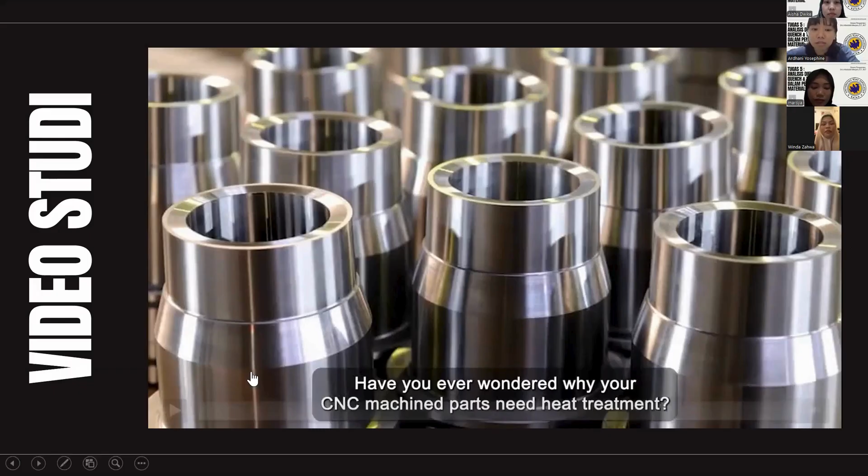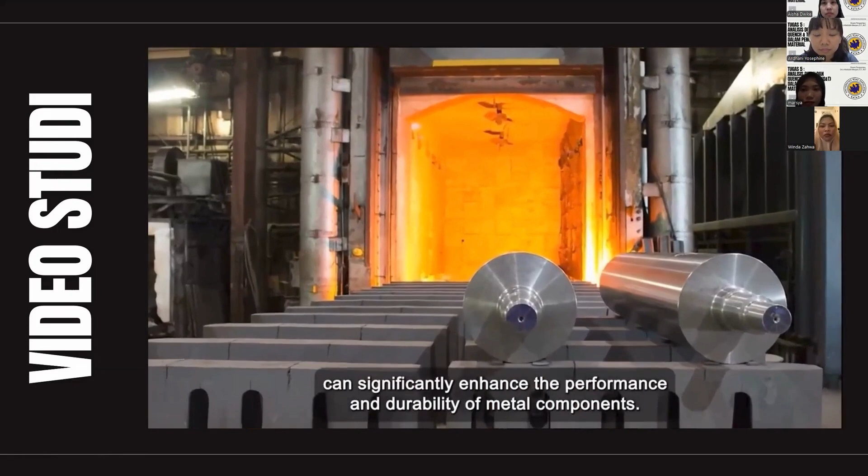Have you ever wondered why your CNC machined parts need heat treatment? The answer lies in the transformative power of heat treatment, a process that can significantly enhance the performance and durability of metal components. Welcome to Rapid Direct. Today we'll explore the process of heat treatment and how it works. Without further ado, let's get to it.

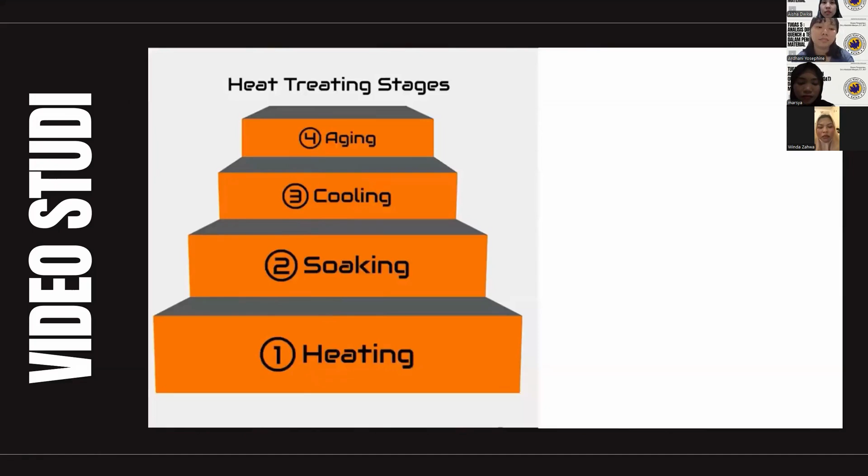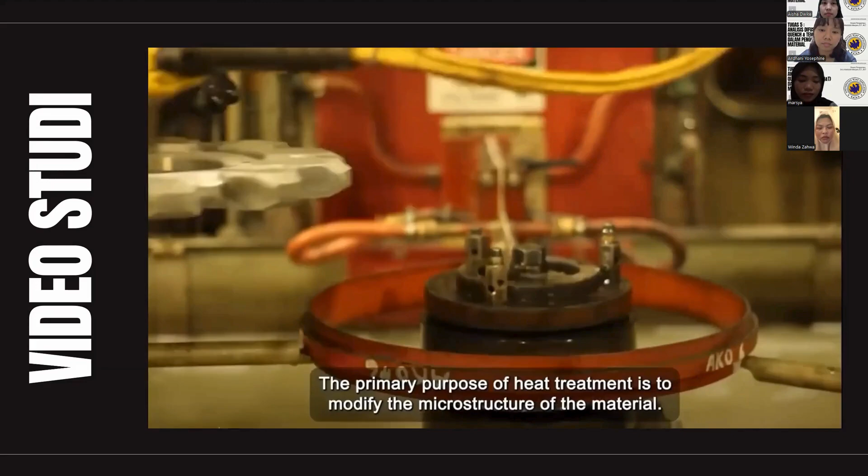Heat treatment is a controlled process that involves heating and cooling metal components to alter their properties. The primary purpose of heat treatment is to modify the microstructure of the material. This, in turn, affects its hardness, strength, ductility, and other characteristics. This means heat-treated parts can withstand greater stresses and perform better under demanding conditions. This process can profoundly impact the performance and longevity of various products.

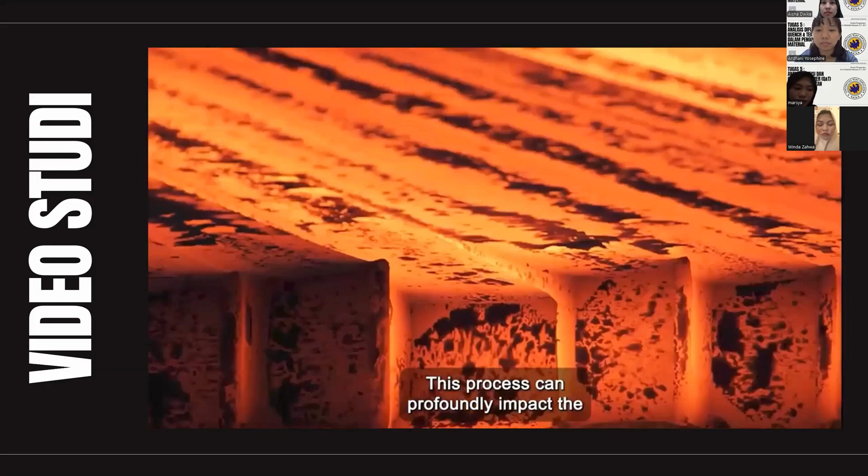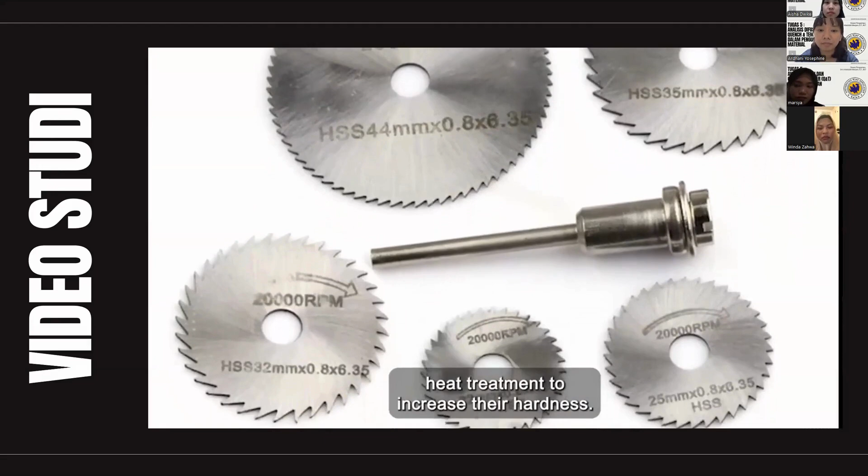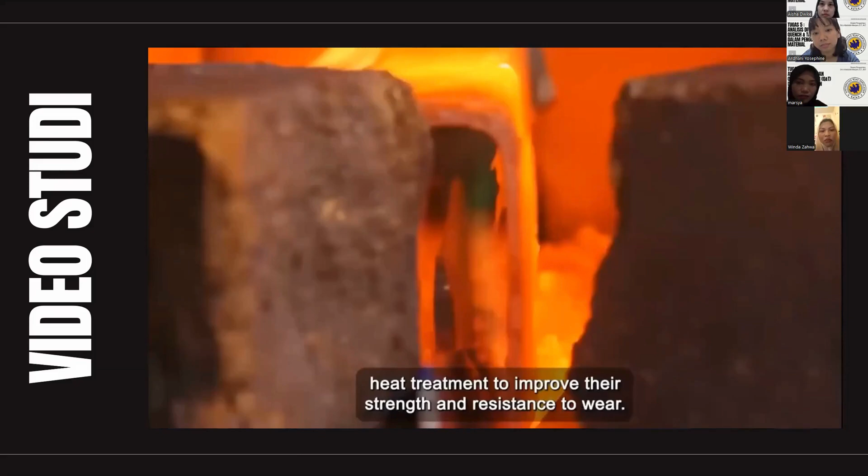To better grasp the significance of heat treatment, let's consider a few examples. Tools, like drill bits and cutting blades, undergo heat treatment to increase their hardness. This enables them to withstand repeated use and maintain sharp cutting edges. Automotive parts, like engine components and gears, often undergo heat treatment to improve their strength and resistance to wear.

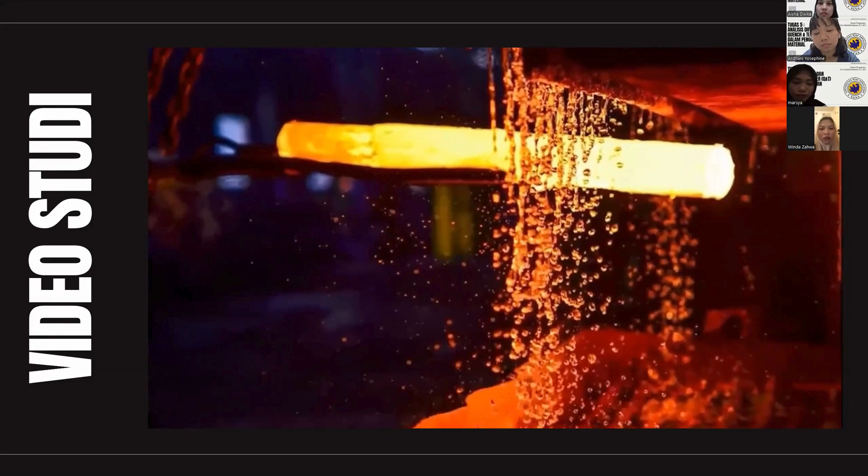Now, let's explore the 5 fundamental heat treatment techniques that are commonly used to achieve specific material properties. The first one is annealing. It involves heating the material to a specific temperature and then slowly cooling it to make it softer and more ductile. This process also improves machinability, making the material easier to shape and form.

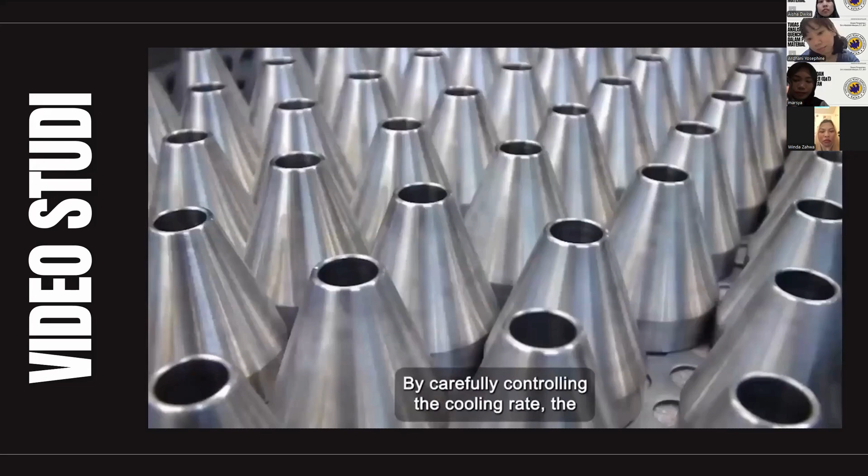Secondly, we have quenching. This is the rapid cooling of the materials to increase their hardness. By carefully controlling the cooling rate, the microstructure of the material can be transformed. This process is known as martensitic transformation. This results in a harder and more brittle state.

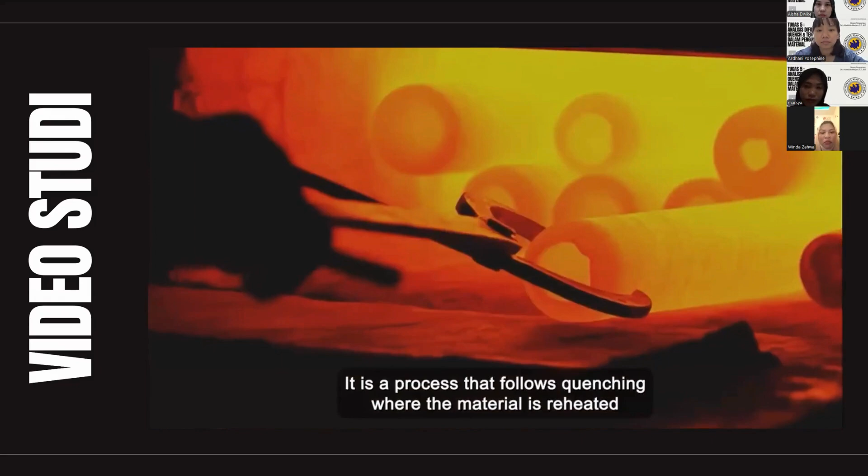The third technique is tempering. It is a process that follows quenching, where the material is reheated to a specific temperature and then cooled in a controlled manner. This step helps reduce the brittleness introduced by the quenching process while balancing the hardness and toughness of the material to make it more resistant to fractures and ensure optimal performance.

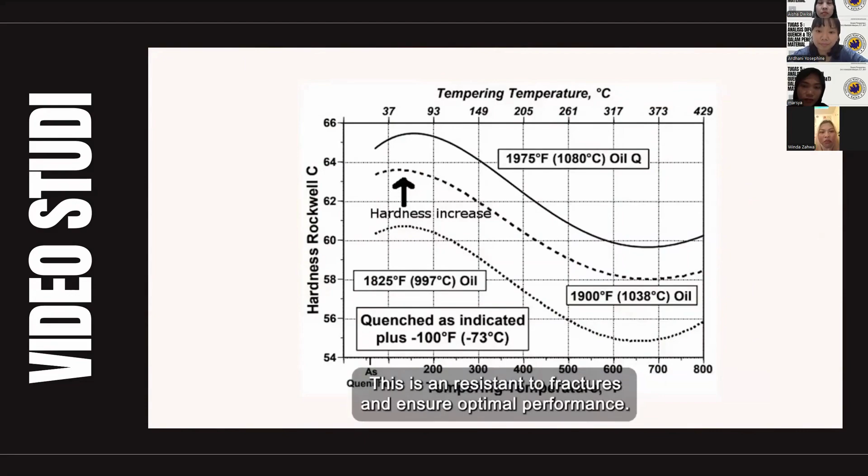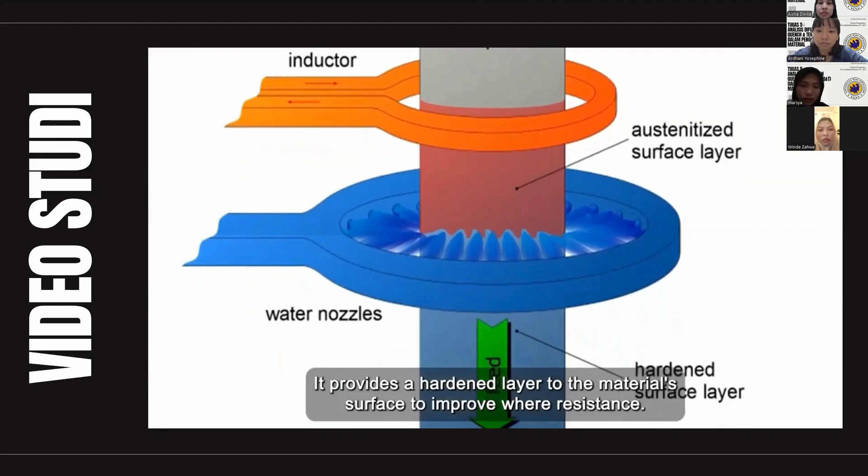The fourth technique is hardening, which involves heating the material to the austenitizing temperature, followed by rapid cooling through quenching to form martensite. It provides a hardened layer to the material's surface to improve wear resistance. This technique is often used for components that require a hard exterior while maintaining a relatively softer and more ductile interior. Finally, there is normalizing.

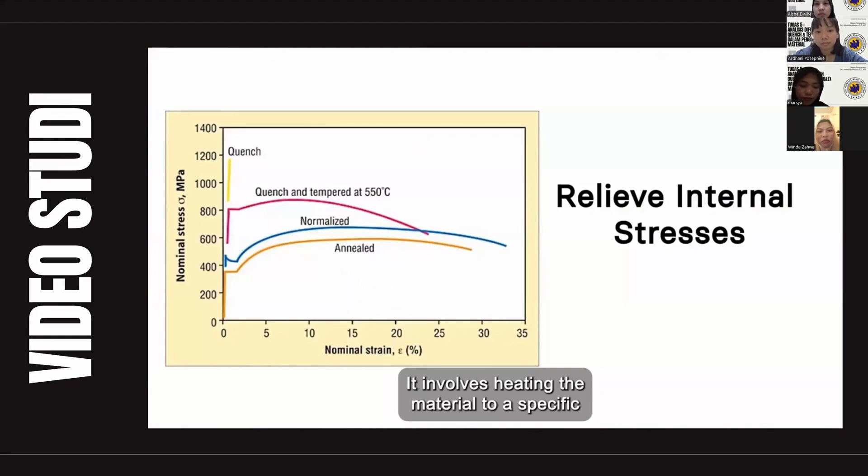This technique aims to achieve a uniform microstructure and relieve internal stresses in the material. It involves heating the material to a specific temperature and then cooling it in still air. This process improves the overall strength and toughness of the material.

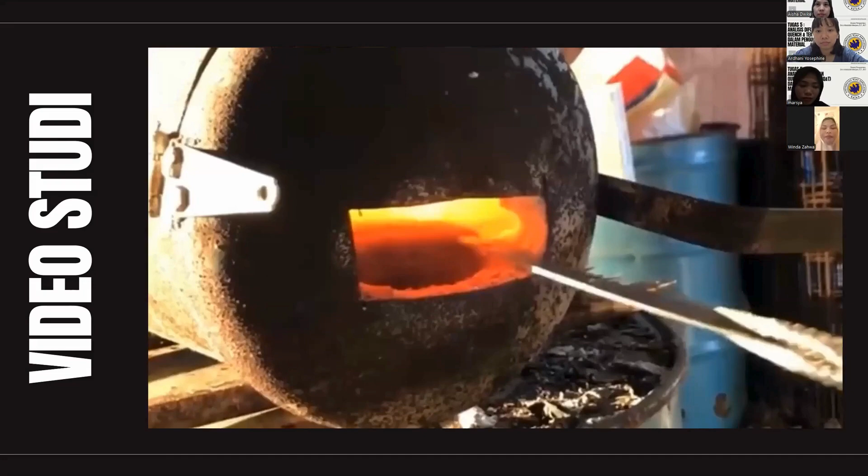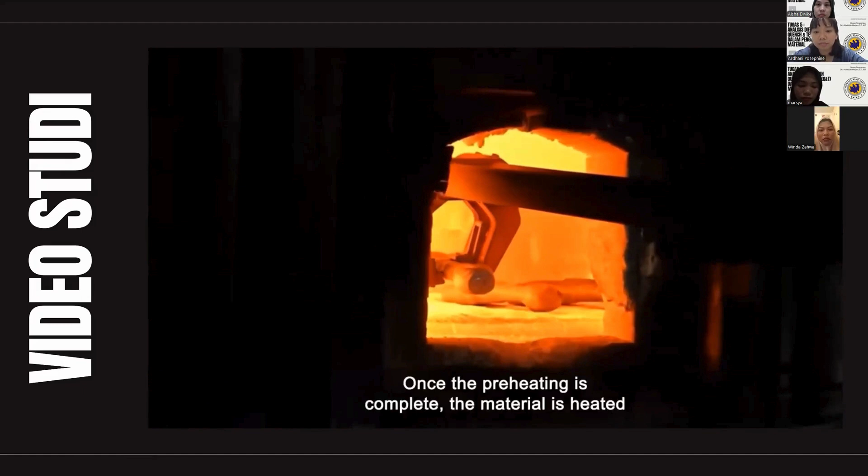Now that we understand the basic techniques, let's walk through the general steps of the heat treatment process. The process begins with preheating, where the material is gradually brought to a specific temperature. This step ensures even heating and prepares the material for the next stages. Once the preheating is complete, the material is heated to a temperature suitable for the desired transformation.

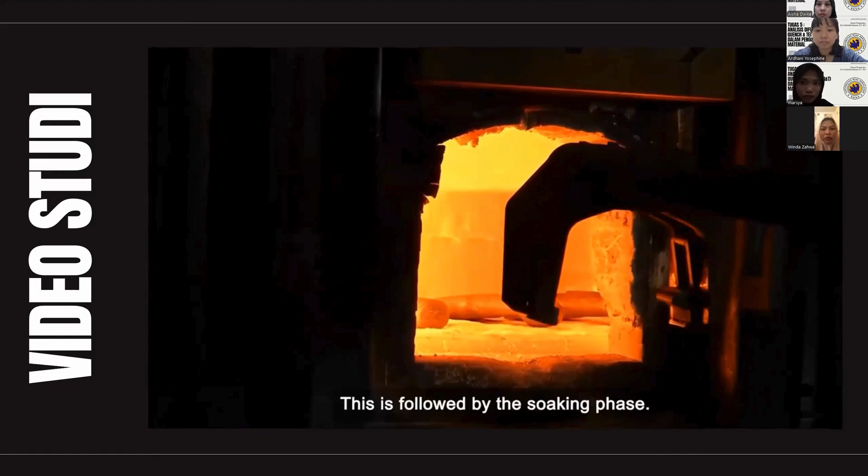The exact temperature depends on the material and the desired outcome. This is followed by the soaking phase, which involves maintaining the material at the desired temperature for a specified period. This allows the internal structure to reach equilibrium, ensuring the desired transformation occurs uniformly throughout the material.

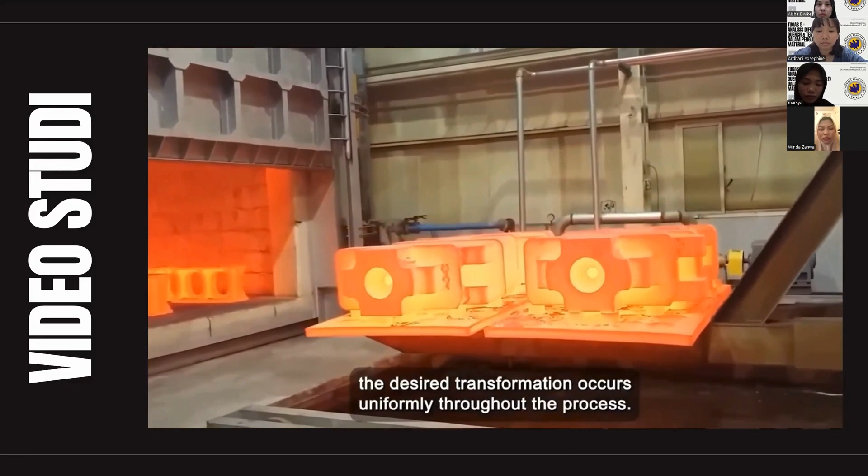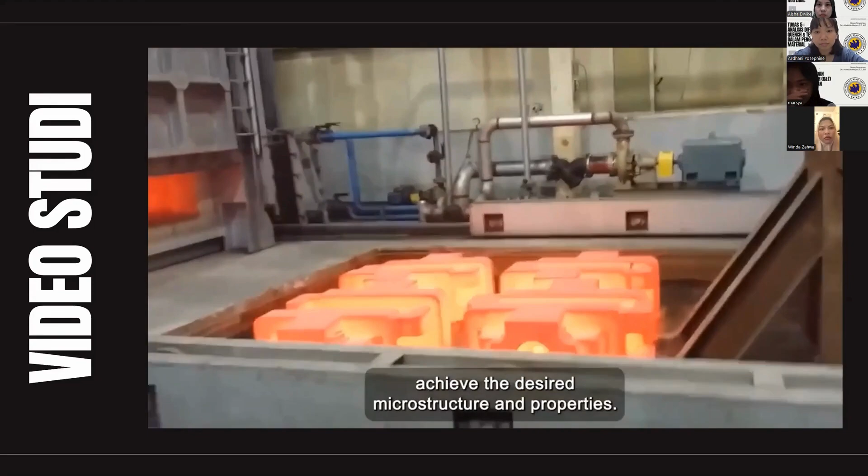After the soaking phase, the material undergoes controlled cooling. The cooling rate is carefully controlled to achieve the desired microstructure and properties. Different cooling methods are employed depending on the material and the desired outcome, such as air cooling or quenching in specific media like water, oil, or polymer.

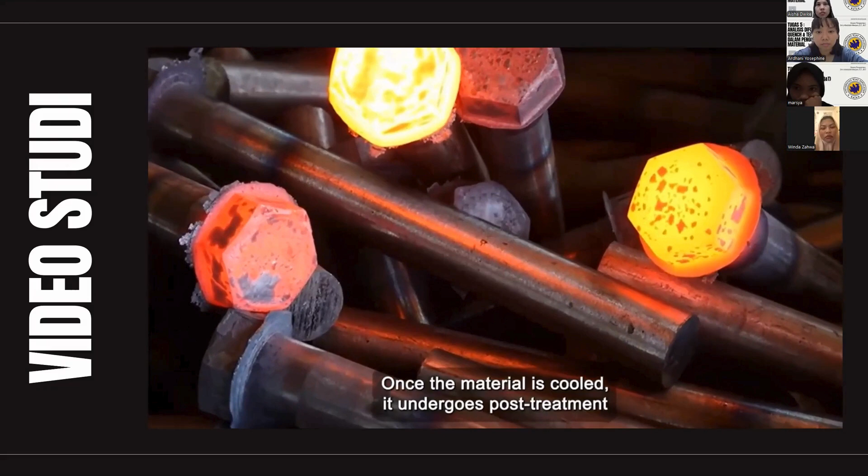Once the material has cooled, it undergoes post-treatment processes, including cleaning, inspection, and finishing. These steps ensure the final product meets the required specifications and quality standards.

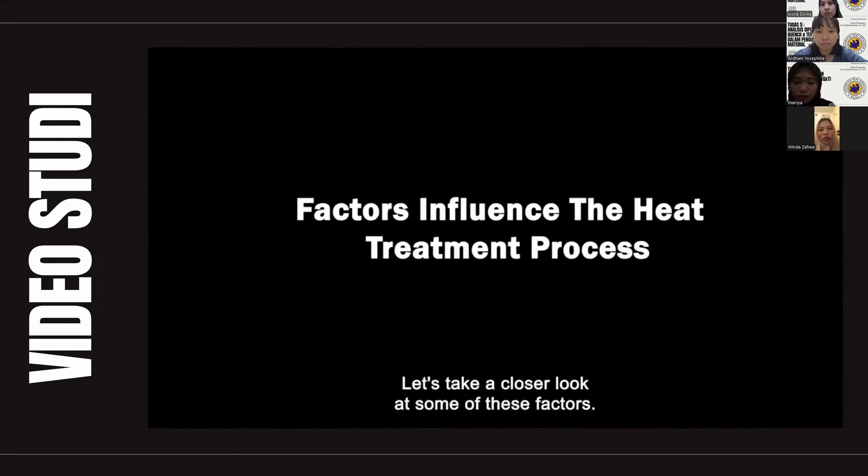Several factors influence the heat treatment process and its outcome. Let's take a closer look at some of these factors. First, material composition. Different materials respond differently to heat treatment. Their chemical composition is crucial in determining the optimal heat treatment parameters and the resulting properties.

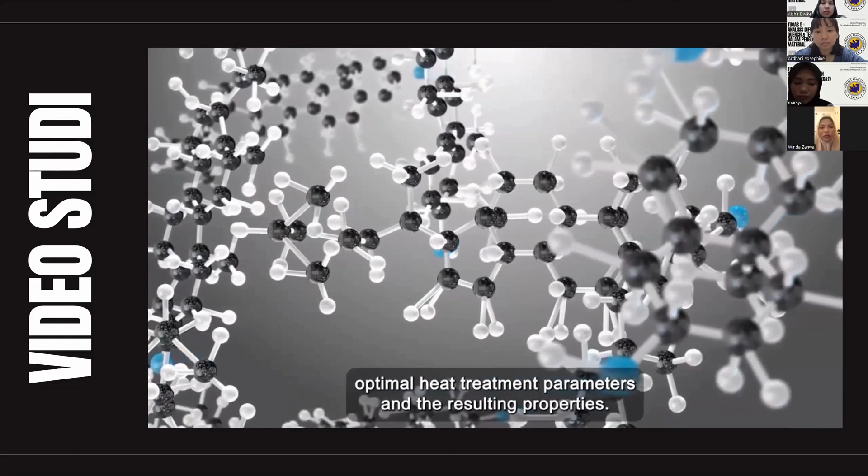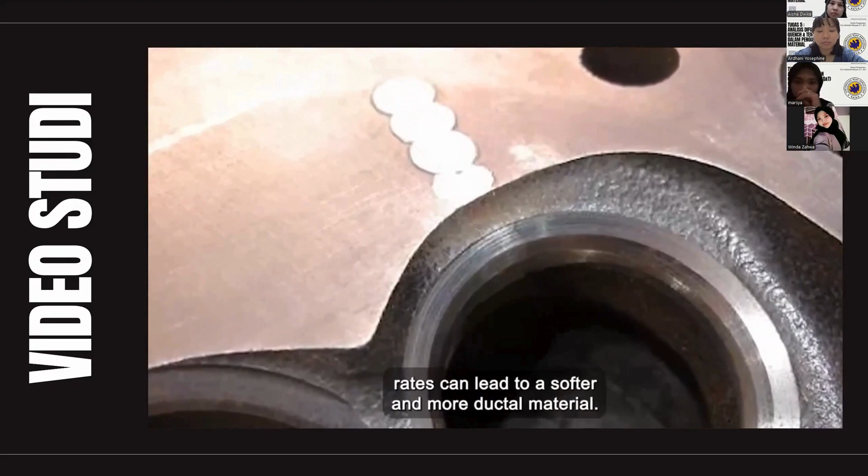Second, heating and cooling rates. The rates at which the material is heated and cooled have a significant impact on its microstructure and properties. Rapid cooling promotes hardness, while slower cooling rates can lead to a softer and more ductile material.

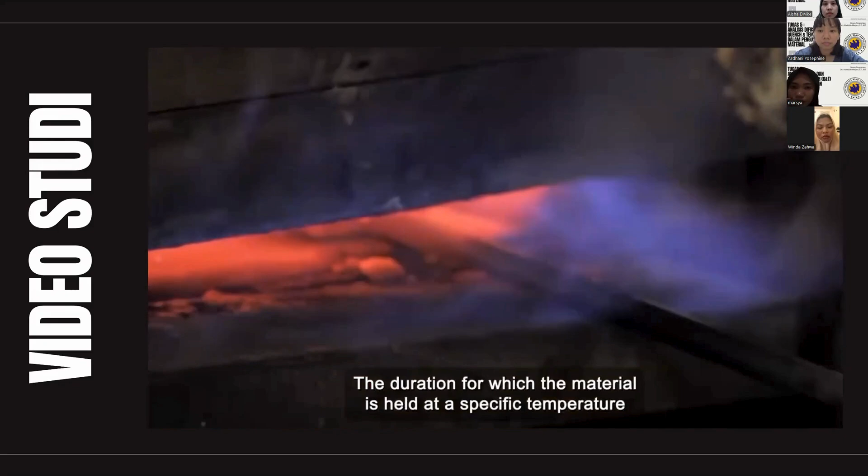Third, temperature control. Precise temperature control is essential throughout the heat treatment process. Accurately measuring and maintaining temperatures ensure consistent results and desired material properties. Fourth, time at temperature. The duration for which the material is held at a specific temperature affects the extent of transformation and the resulting microstructure.

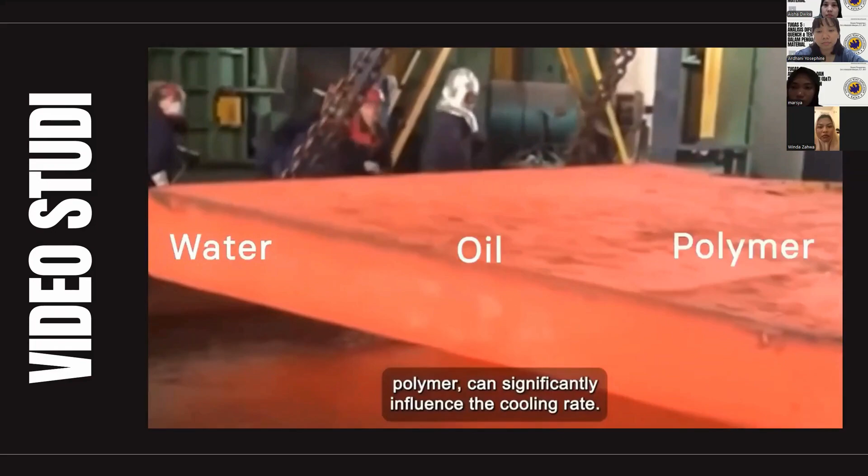Fifth, quenching media. The choice of quenching medium, such as water, oil, or polymer, can significantly influence the cooling rate. As a result, it will affect the material's final properties. Each quenching medium offers different cooling characteristics.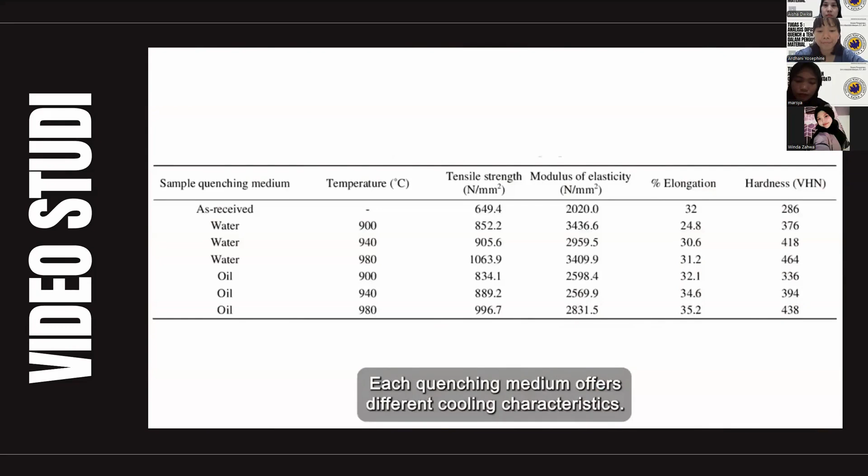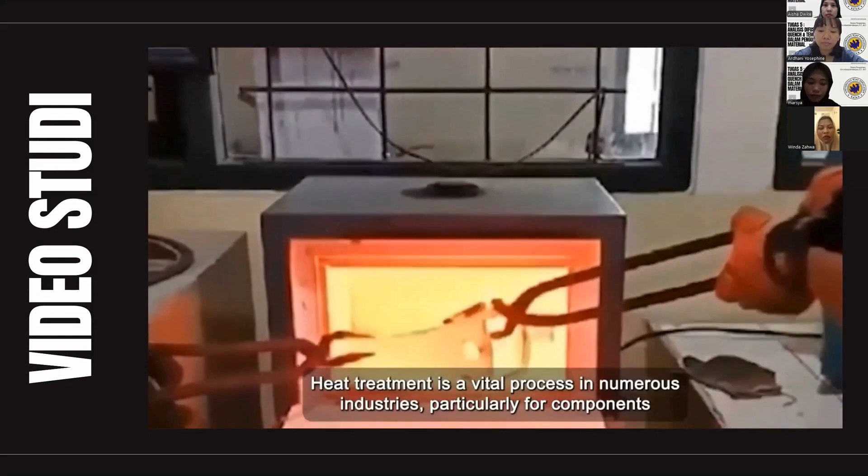In summary, heat treatment is a transformative process that can greatly enhance the mechanical properties of metal components. Through various techniques, the microstructure of materials can be modified to achieve desired characteristics. Heat treatment is a vital process in numerous industries, particularly for components that demand exceptional durability and robustness, such as tools, gears, springs, and more.